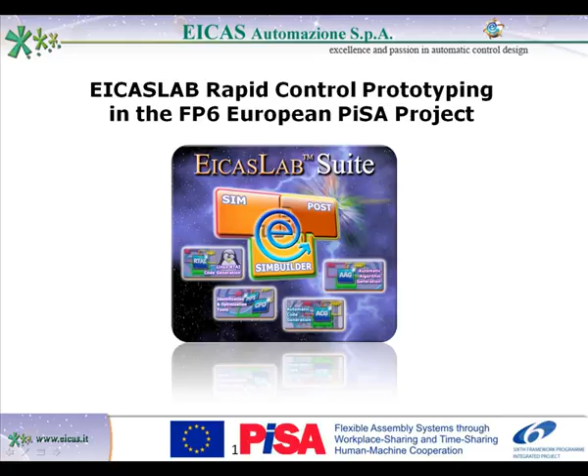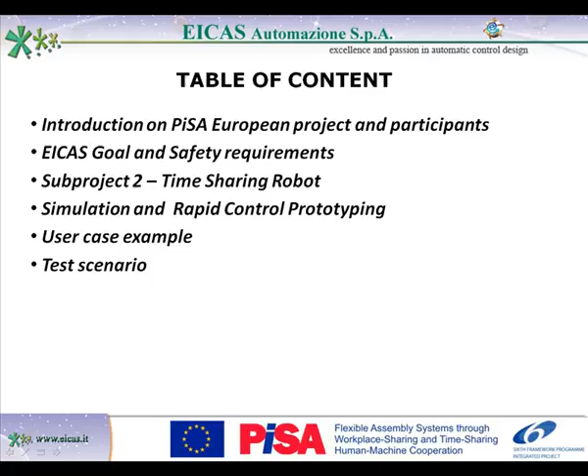In detail, the topics presented in this webinar will be an introduction on PiSA European project, main role and activities of EICAS in the project, an overview on the sub-project 2 presented in the webinar, a description of the simulation and rapid control prototyping development phases, a user case example, the test scenario taken into consideration, and a short movie of a real test performance.

So, let us start from a brief description about PiSA project. PiSA is an integrated project of the 6th Framework Program. The idea that leads the project is to combine human flexibility, intelligence, and skills with the advantages of sophisticated technical systems that can help workers without replacing them.

In fact, PiSA's main objective is to keep humans in the production loop by supporting them with revolutionary and qualified tools. In order to reach such innovative and productive human-machine cooperation, time-sharing robots and workplace-sharing robots have been investigated and chosen as the solution that best fits the project objective.

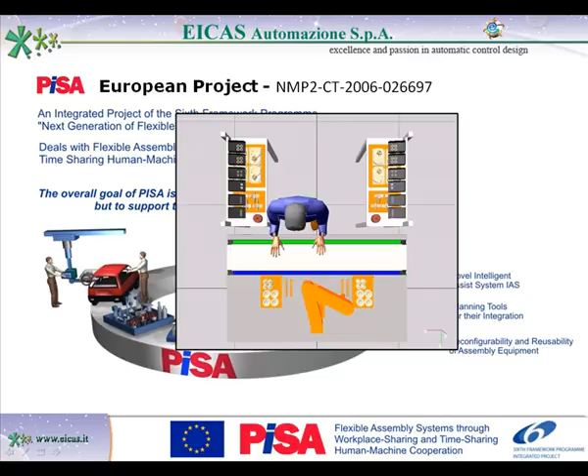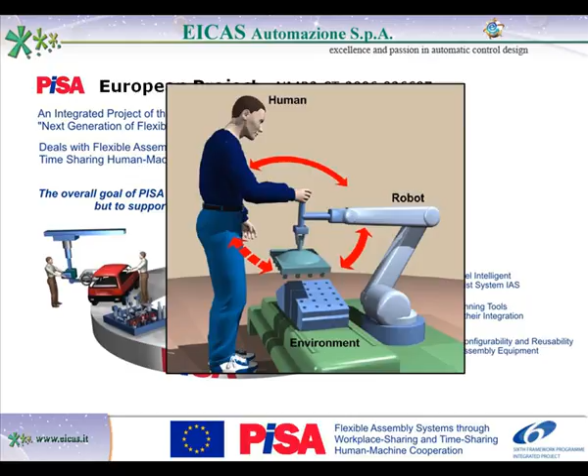The term time-sharing robot identifies a system where humans share time with the robot during its work. In time-sharing, humans and robots work at the same task at the same time but performing different operations without any physical contact. Workplace-sharing robot instead means that the human operators share the workplace with the robot for executing the same operation, with or without physical contact.

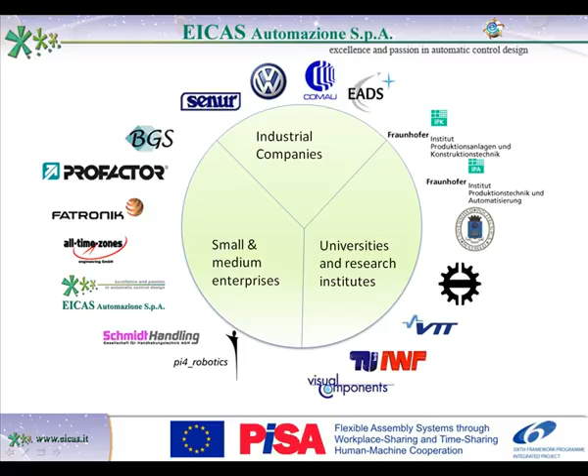PiSA involves many partners all over Europe. In particular, we can find 4 industrial companies, 7 small and medium enterprises, and 7 research institutes that cooperate in the project. The main role of EICAS in PiSA project deals with guaranteeing human safety in the working area.

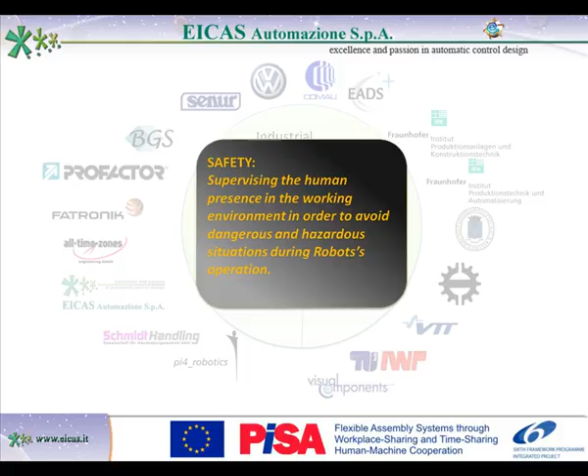Safety is a critical and important topic when human and robot share in some way the same environment without a physical shield that divides them. So, EICAS's goal is to supervise the human presence in the working environment in order to avoid dangerous and hazardous situations during the production cycle.

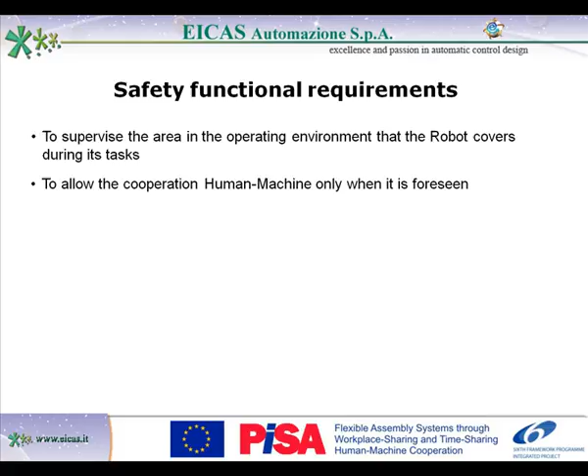In detail, when we speak about safety in PiSA human-robot cooperation, some functional requirements have to be satisfied. They are: to supervise the area in the operating environment that the robot covers during its task, to allow human-machine cooperation only when it is foreseen, to signal hazardous situations to the robot controller for stopping the movement, to give the possibility to change dynamically during robot's movements the shape of the supervised area, and to slow down the robot velocity by means of an override factor during the human-robot approaching.

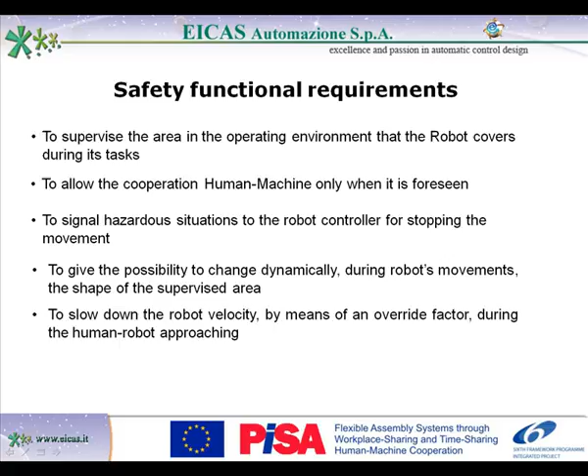Well, as I said before, in the next slides we will focus on time-sharing robots, that is part of the PiSA sub-project 2, also called SP2. SP2 involves a time-sharing robot composed of 2 arms and able to carry out complex assembly tasks. In the following, it will be called dual arms robot. In this case, robot and humans work at the same time but on different operations, without physical contact.

The innovative aspect considered in PiSA is to allow the human to approach the robot under certain circumstances, in order to fulfill specific operations such as localization, support on alignment, supervision, task reprogramming, exception handling, and so on. All these operations require knowledge, flexibility, and human skills, so they need to be carried out by a human worker.

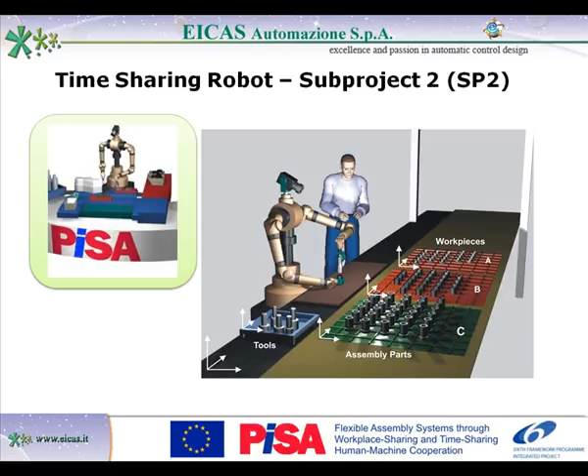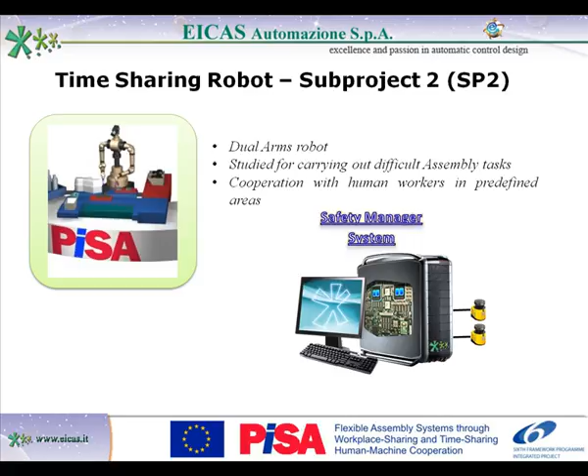When we start to think about this approach, it is clear that safety is a key issue to be addressed. EICAS has answered such an issue by designing a suitable control of a higher hierarchical level, in the following called Safety Manager, able to monitor the human presence in the area and to command necessary actions for guaranteeing the human safety.

To design the Safety Manager, EICAS has adopted its control design methodology, implemented through its own professional software suite, EICASLAB. EICASLAB is the professional software suite that supports the developer with several tools in all the control design phases, from the system concept and real-time simulation to the rapid control prototyping until the code generation for the final target.

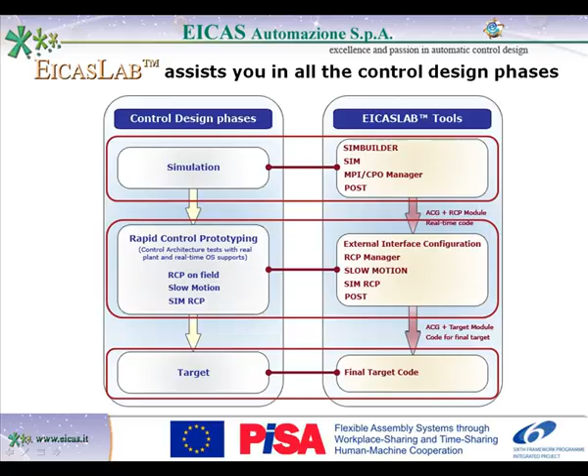In PiSA project development, many EICASLAB tools have been involved. For example, we have used the Sim Builder for modeling the dual arms robot and developing the control strategies, the Sim and the Post for performing simulations and offline analysis, the MPI CPO Manager for parameters identification and optimization during the development of the tracking algorithm for detecting and

foreseeing the human position, the scheduling chart for managing the control activities and their synchronization, the Rapid Control Prototyping Manager for managing the real-time application during the Rapid Control Prototyping test, the external interface configuration for connecting the external subsystems and sensors, and so on.

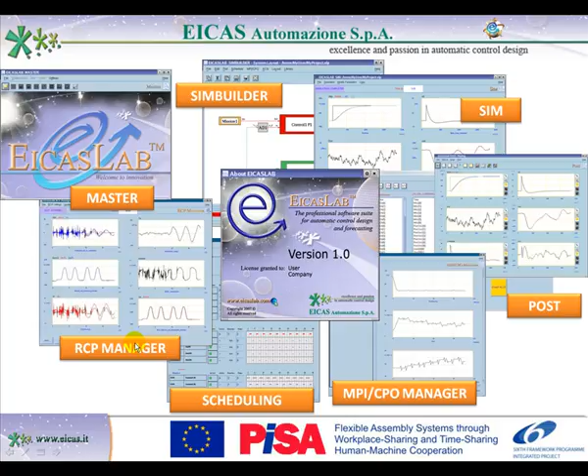As is schematically presented in this slide, after the simulation, EICASLAB allows to switch the project on the Rapid Control Prototyping modality. To be noticed that the software developed in simulation, represented in figure by the chip, is the same one used in the Rapid Control Prototyping activities.

EICASLAB, the RCP module, and all the project software run on the so-called EICASLAB Rapid Control Prototyping platform. The RCP platform is based on a standard PC provided with suitable interfaces and a real-time kernel support. On the RCP platform, the developer has at disposal a real-time operating system, multi-core and multi-thread management tools, a real-time manager for commanding the real-time layer, the possibility to run a friendly graphical user interface, and the possibility to interface directly the external hardware.

For interfacing external devices, EICASLAB offers some built-in libraries, or the access to a pre-organized structure of functions that make it easy to integrate custom interfaces. In PiSA subproject 2, the hardware to be connected are the laser scanners and the external controllers, the robot controller and the central controller.

Hence, as you can see, the Safety Manager is a control system that works on a high hierarchical level. It takes the measurement about the human presence in the area through the two laser scanners, and then it closes a loop on the robot controller by giving the permission of work plus an override factor used for slowing down the robot.

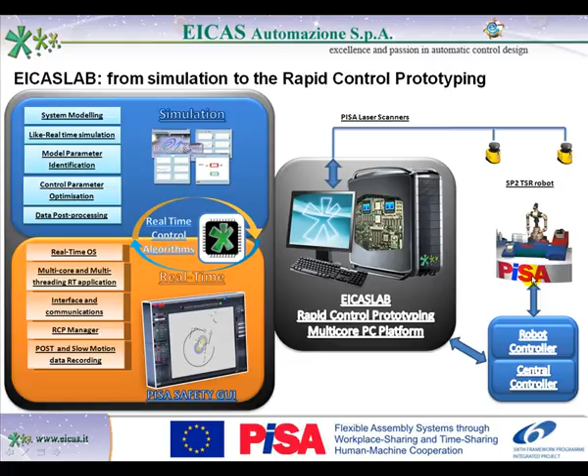For a better understanding, in the following slide, I will show a hypothetical situation that covers the SP2 application. Here we have the dual arms robot station, the Safety Manager, and the first laser scanner. The second laser scanner is positioned at the opposite corner of the table, and so it is not visible in figure. After an offline configuration, the system can be switched on.

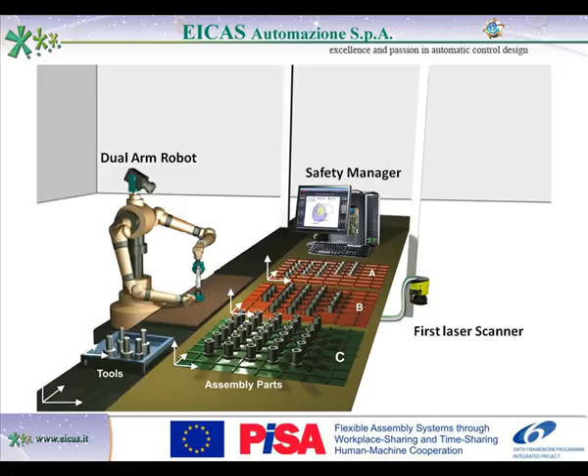For the first seconds, the Safety Manager detects and memorizes the contour of the place for making its own references. Then the Safety Manager starts to monitor the first surveillance areas, and each laser scanner sets a protective and a warning area to watch over. Until the humans remain external to the warning areas, the robot works normally, and the Safety Manager does not interfere.

Once the human oversteps the warning area, the Safety Manager starts to operate and gives to the robot controller an override factor for slowing down the robot. The override factor is proportional to the distance between robot and human. If the operator oversteps also the protective area, the Safety Manager revokes the permission of work, and the robot controller stops the movement. As soon as the operator comes back, the Safety Manager restarts to grant the permission of work and to set the appropriate override factor.

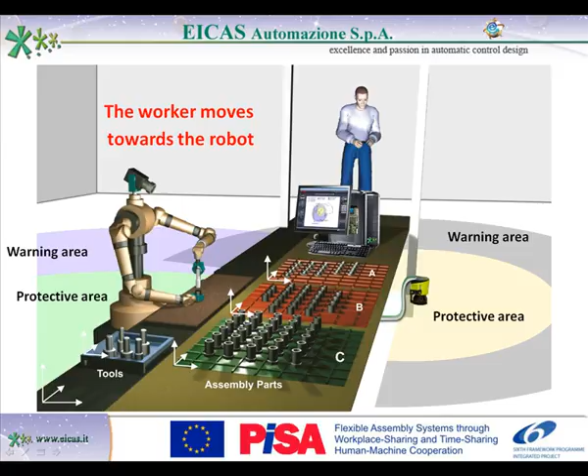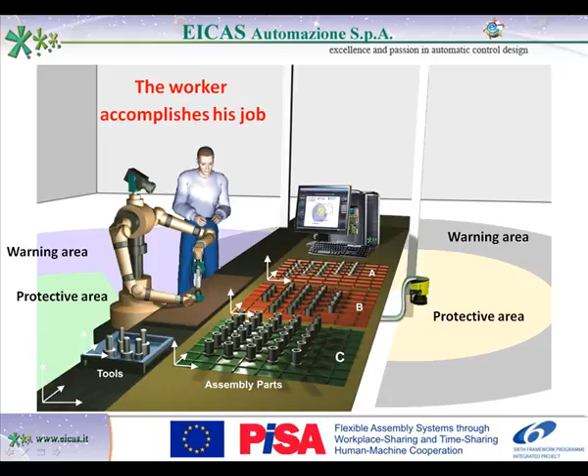Now, beyond these basic safety functionalities, one of the requirements is to allow the human to approach the robot under certain circumstances. For this reason, the shape of the supervised area can be dynamically changed according to the application requirements. In this case, a passage in the green protective area has been opened, and the worker can enter to accomplish his job. The robot does not stop, it only slows down according to the human distance. Once completed the operation, the worker steps back, and the areas are closed and protected again.

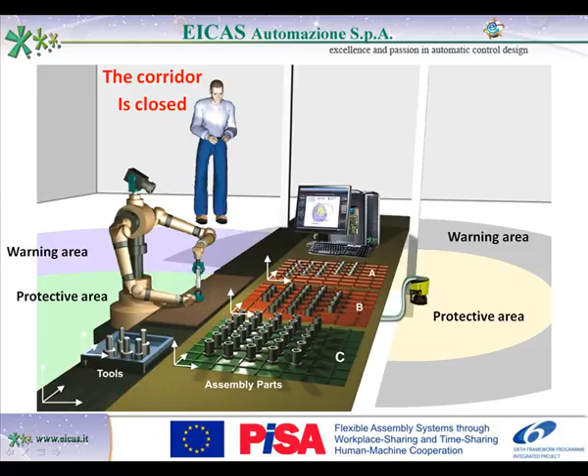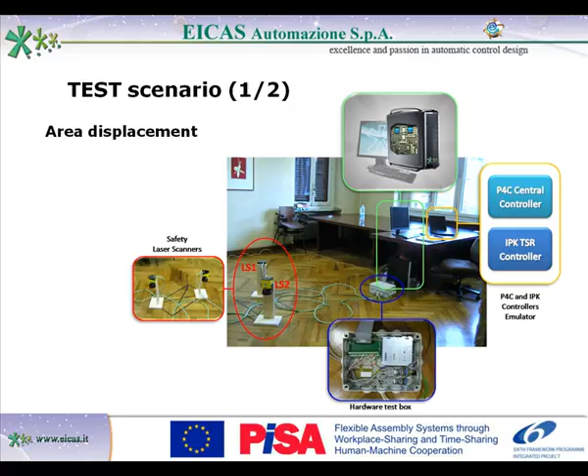After the simulation and the rapid control prototyping phases, the Safety Manager is ready for a first real test. A suitable test scenario has been set up by EICAS with the EICASLAB RCP platform connected directly to the real interfaces. As you can see, there are the two laser scanners with all the converters and the connectors enclosed into the hardware test box, and a simulator for the robot controllers. The whole environment may be monitored and displayed on the Safety Manager PiSA graphical user interface, where it is possible to follow the system status and the test evolution.

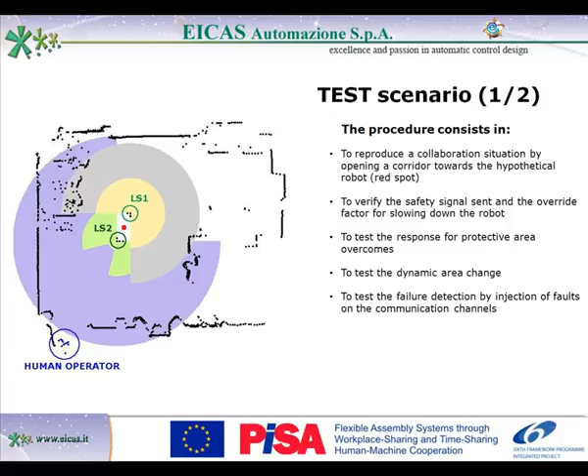Today we are here to show how the Safety Manager system, developed by EICAS Automazione within the European project PiSA, works in a real case.

The Safety Manager goal is to supervise the human presence in the working environment, in order to avoid dangerous situations between the human workers and the robot during the production cycle. In particular, the prototype that we will show you today is customized for the SP2 use case, where the time-sharing robot is considered. A representative testing scenario for the Safety Manager has been implemented at EICAS premises, in order to verify and validate the system performance.

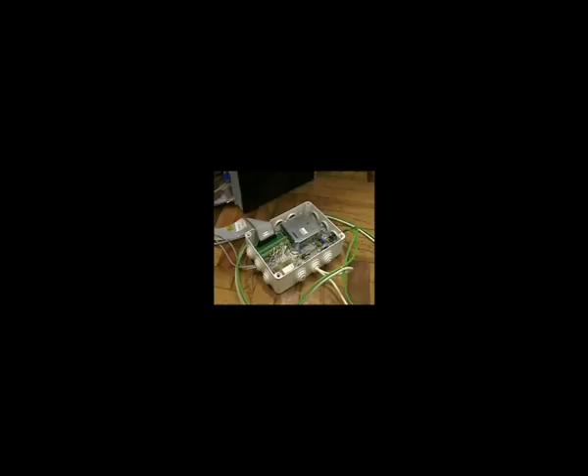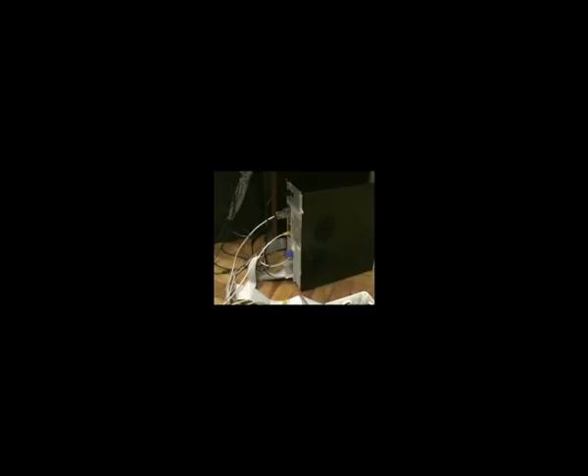The laboratory scenario is composed by several components. First, there are two safety laser scanners for monitoring the working area. They are placed at the corners of a rectangular reference, highlighted with black stripes, with a height from the ground of roughly 30–50 cm. Then there are four cables, 5 meters long, that connect the laser scanners with the hardware test box. It contains the power supply, some connectors, the serial converters, and the laser scanner's communication interfaces toward the Rapid Control Prototyping platform, called from now on RCP.

The RCP platform is based on a standard PC, provided with a real-time operating system, in this case Linux RTAI, and with suitable interfaces for the sensors. In this case, we have a serial PCI card and a data acquisition board from National Instruments. On the RCP platform runs the EICASLab software suite, equipped with the Rapid Control Prototyping module. The Safety Manager system, with all blocks and functionalities, has been implemented in EICASLab.

Besides, a devoted Safety Manager graphical user interface has been also implemented for monitoring all the safety issues. It receives data from EICASLab suite in order to display in real time the contour of the room, the human personnel that is moving nearby the robot, and all the other information concerning laser scanner status and connections. The testing environment is completed by another PC that emulates the P4C central controller and the IPK robot controller.

So, for concluding the introduction, the Safety Manager works at the highest hierarchical level of the control architecture. It takes the measurements about the human presence in the area through the two safety laser scanners, and it gives back the permission of work plus an override factor for slowing down the robot. And now we can start the test.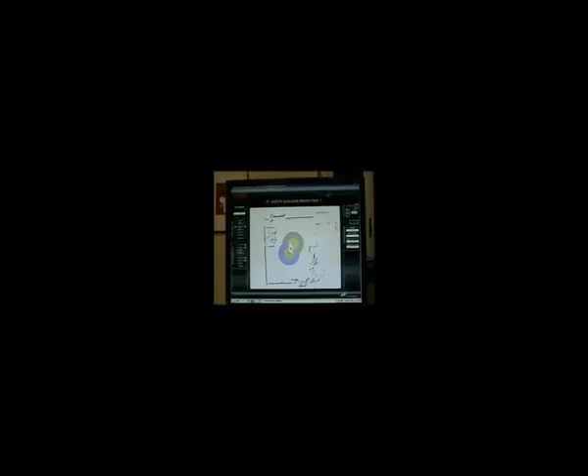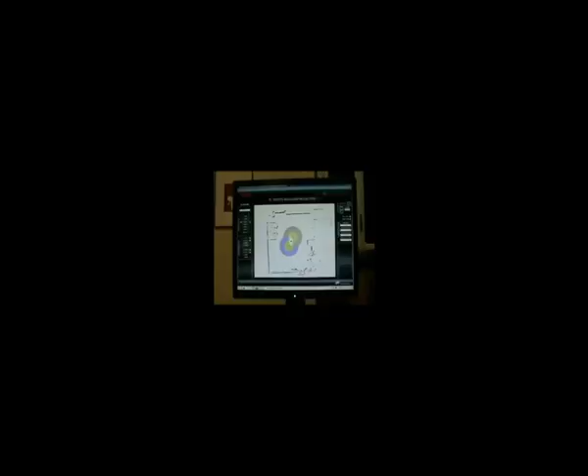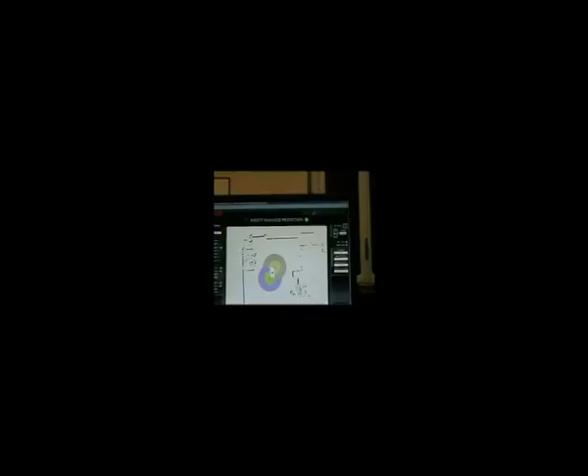To begin our test, we start with the Safety Manager running in idle state, as you can see from the red light at the top of the screen, and with the human operator standing outside of the supervised area. From the P4C emulator we can activate the Safety Manager protection, and after a few seconds necessary for the calibration, the green LED in the Safety Manager GUI lights up, indicating that the protection is enabled.

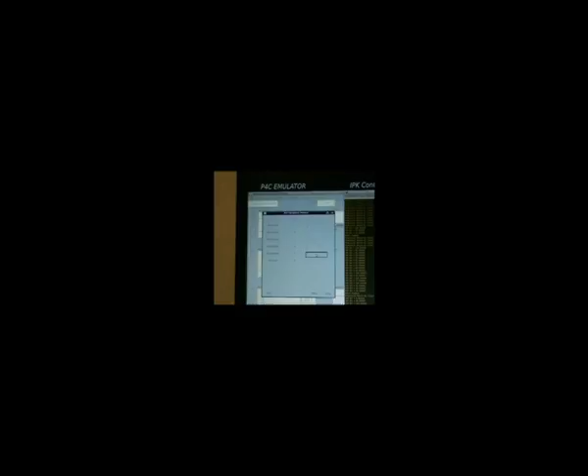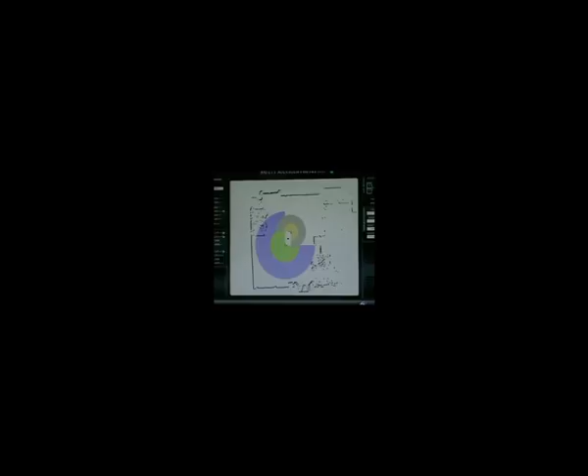Always from the P4C emulator we can change the protective areas, and, for example, we can switch from use case 1 to use case 2, as shown by the enlargement of the fields set in the Safety Manager graphical user interface. At this point, the operator starts moving in the area toward the first laser scanner. The Safety Manager detects him, and we can follow his movement directly on the graphical user interface.

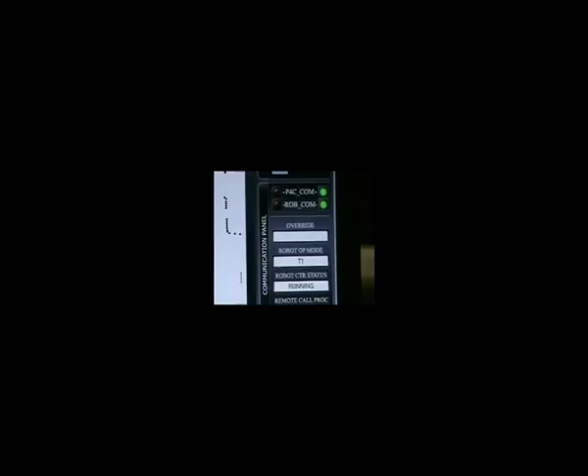Until the operator remains outside of the warning area, the robot can work normally, but as soon as he oversteps the warning area, an override factor lower than 100% is sent to the IPK robot controller. The value of the override factor is shown both on the Safety Manager graphical user interface and on the shell where the IPK robot controller emulator is running. The override factor decreases until the worker reaches the protective area.

If he oversteps this bound, a signal of stop is sent to the IPK robot controller, and it is shown always both on the Safety Manager graphical user interface and on the shell where the IPK robot controller emulator is running. If the worker comes back outside the protective area, the Safety Manager restarts giving the permission of work and setting the right override factor.

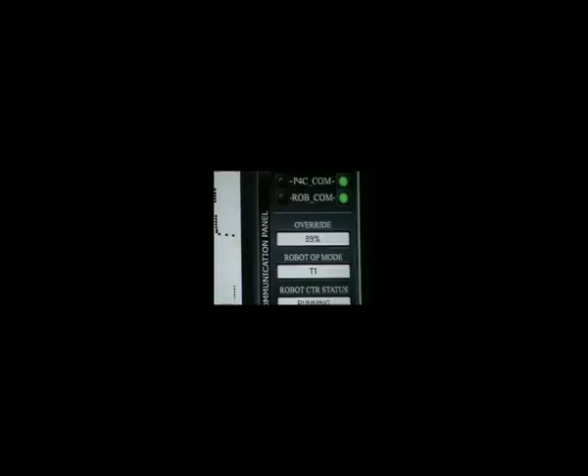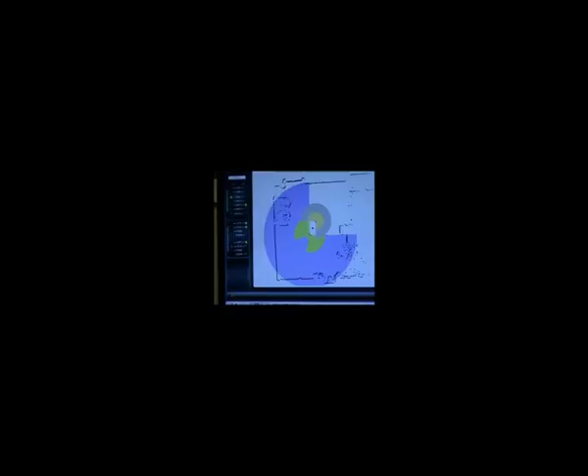Now, let's suppose that you want to allow the worker to approach the robot for collaboration tasks. From the P4C central controller emulator, it is possible to change the supervised areas and set, for example, use case 3. The shape of the area is changed and an available corridor is shown. Now the worker can reach the robot to exploit his tasks.

Within the warning areas, the override factor is always transmitted and the velocity is always reduced proportionally to the distance between robot and human. If the worker oversteps the corridor and enters the protective area, the robot is stopped. When the worker's task is completed, he comes back to the initial position, and the area can be restored.